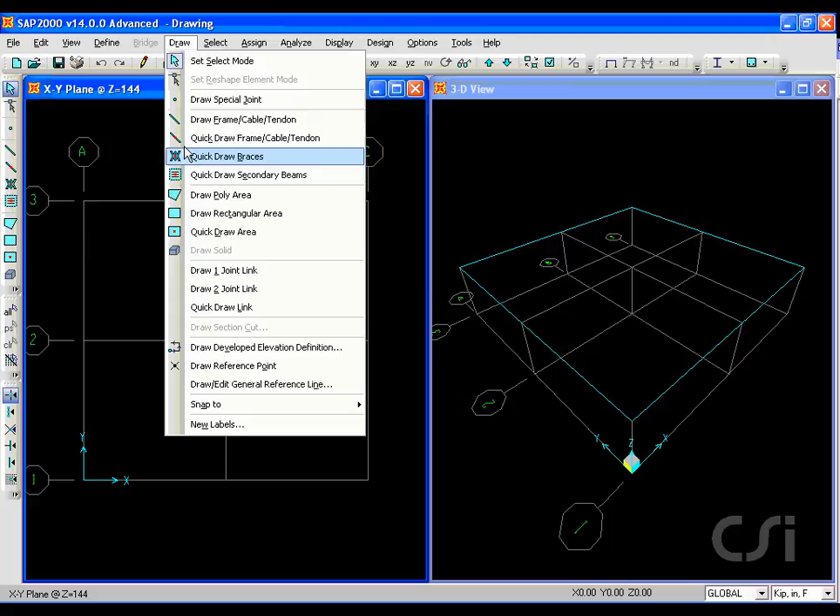SAP 2000 has many drawing tools to facilitate modeling, and this tutorial will demonstrate a number of them. Most models are constructed using either frame objects or area objects. We will start with the Draw Frame command.

We can draw frames anywhere when in a planar view of the model. A right click will lift the pen, but will leave you in the draw mode. You have the option to snap to grids. But again, you may draw anywhere in a planar view.

You can also draw in a 3D view, but the starting and ending points must snap to another item, such as grids, endpoints, and the like. If we try to simply start the frame in space, the point snaps to the origin. You must also snap to end the frame.

There are a number of drawing controls available, including horizontal, vertical, parallel to angle, and others. The letters in the parentheses indicate the hotkey letter to activate the option. If we hit the H key while drawing, the line will be horizontal no matter where the cursor is.

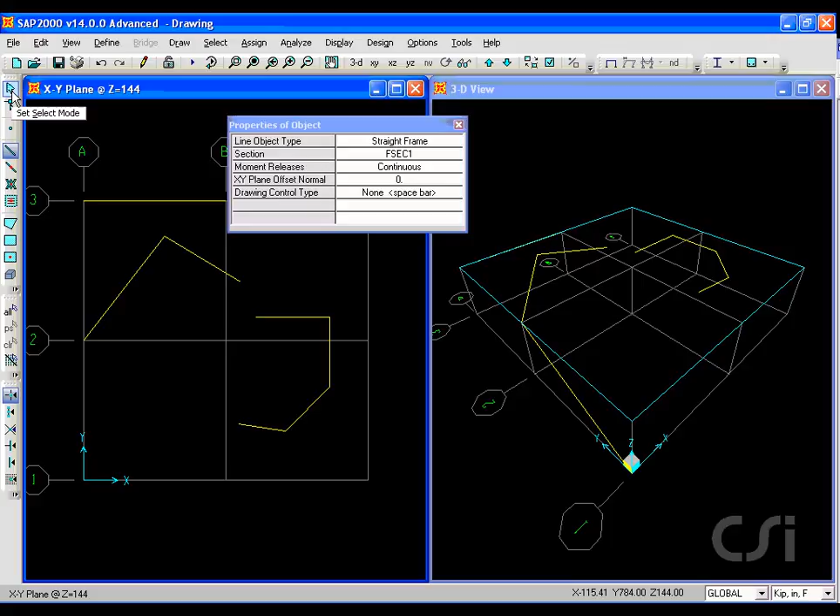The Quick Draw Frame command allows us to generate a frame on a grid with a single click, or on a number of grids by using a selection box.

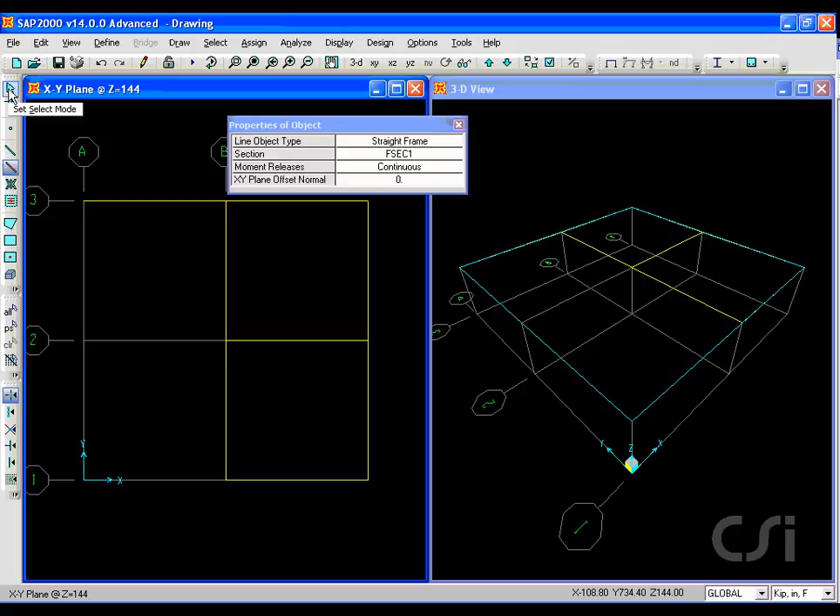Once frames are drawn, there are a number of ways to edit and modify them. One way is to right-click on an endpoint, which brings up the point information form. Select the Location tab and double-click on one of the coordinates. This displays the joint coordinate form where you may edit the endpoint coordinate.

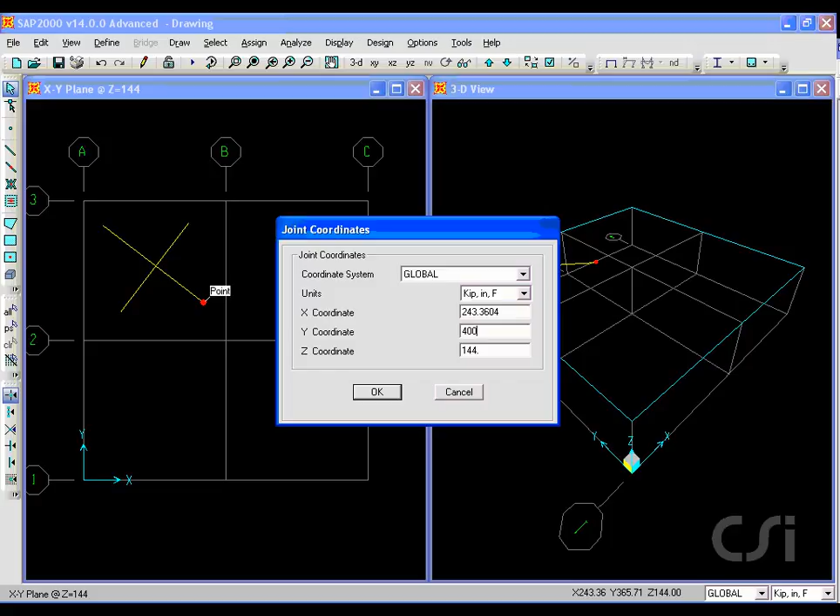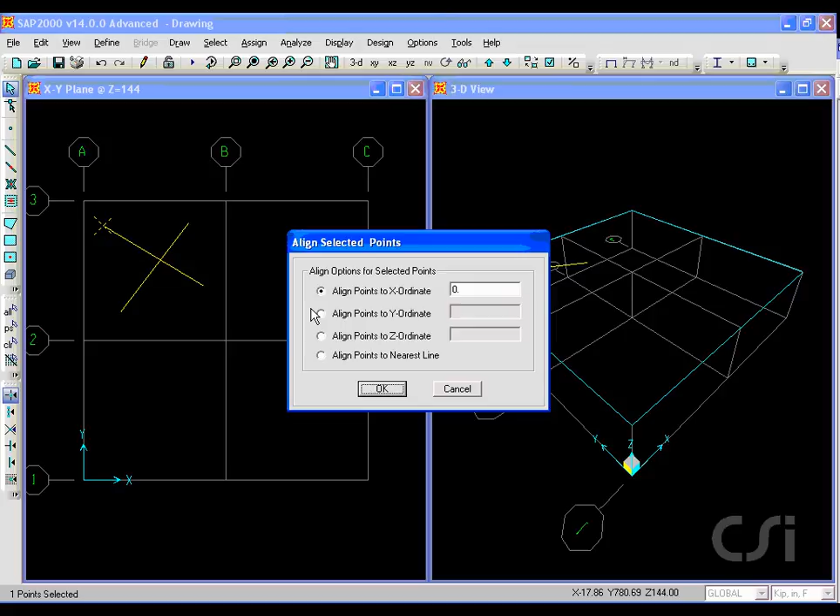You may also move an endpoint by selecting it and going to the Edit menu, Edit Points, Align Points command. If we select the Align Points to X ordinate option with 0, the endpoint will be shifted over to the Y-axis.

The Set Reshape Element Mode command also allows the geometry to be modified. With this command, simply select and hold down the mouse button on the frame object to move it parallel, or select the member and grab one of the endpoints to stretch and rotate the line.

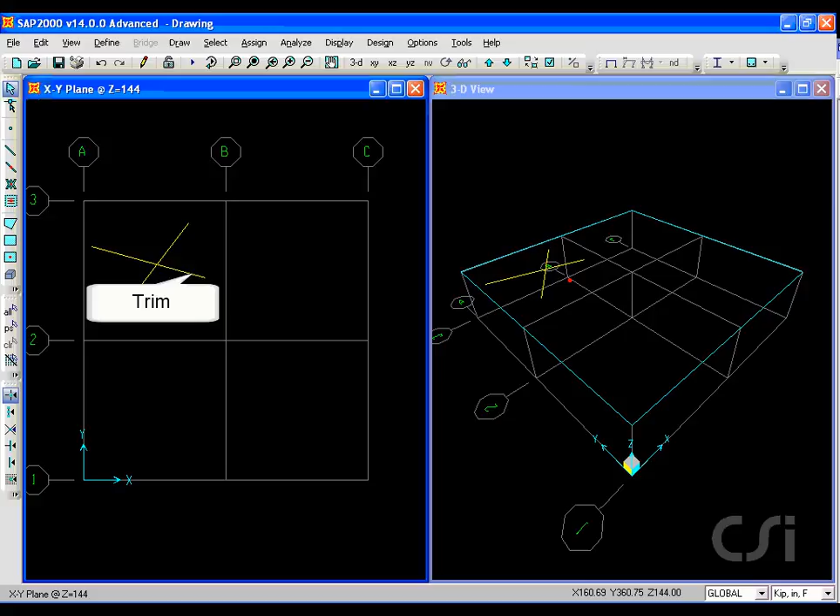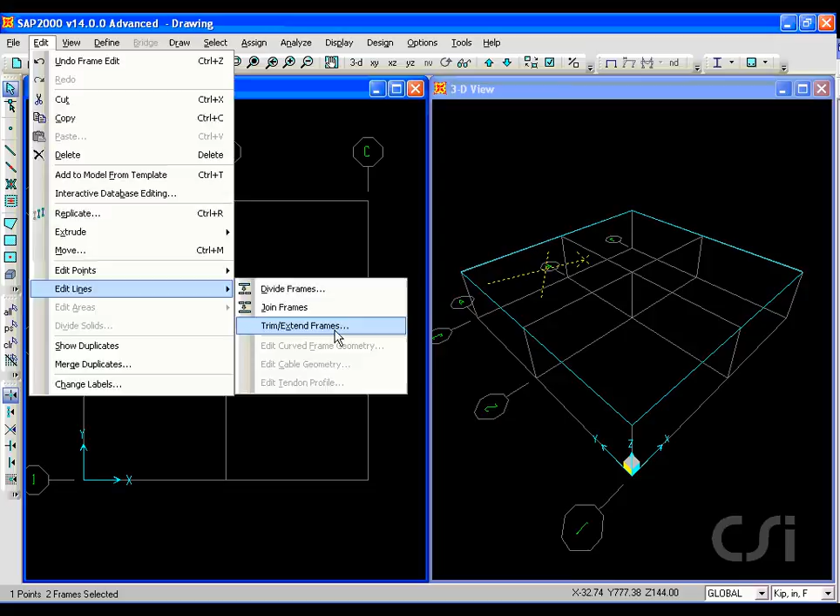Next, we will trim off the segment of the line that extends past the intersection point. We do this by selecting the line to be trimmed, the endpoint on the side to be trimmed, and the line to be used as the trim line. Next, go to the Edit, Edit Lines, Trim Extend Frames command, and select Trim Frames.

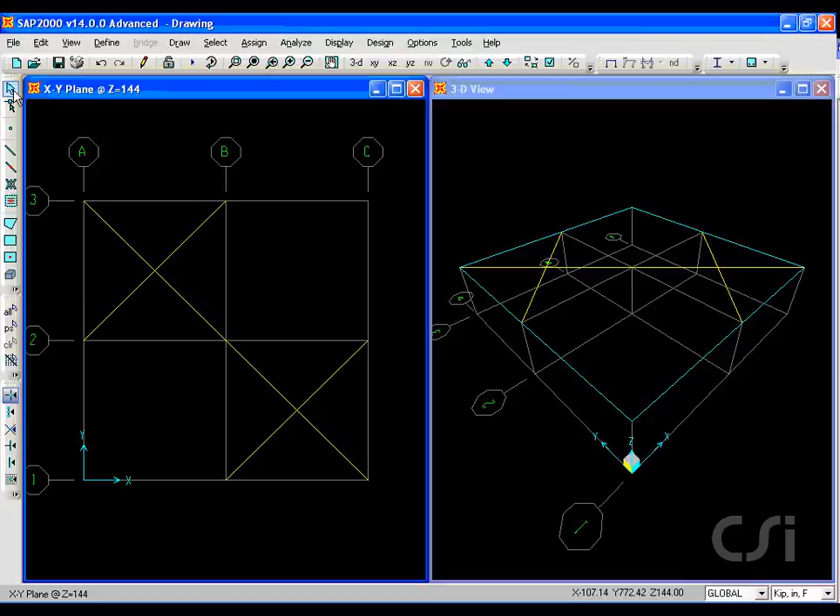The Quick Draw Braces command allows for the generation of bracing with a single click in regions bounded by grid lines. To create secondary beams, select the Quick Draw Secondary Beams button and click in a region bounded by grid lines. The orientation may be in the Y direction,

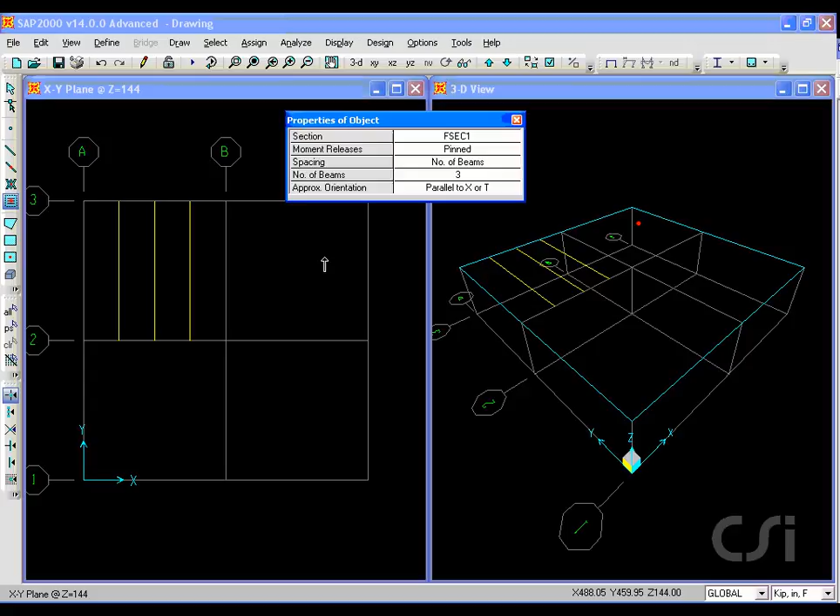the X direction, or in a direction normal to the edge nearest your click. This last option makes quick work of adding miscellaneous framing.

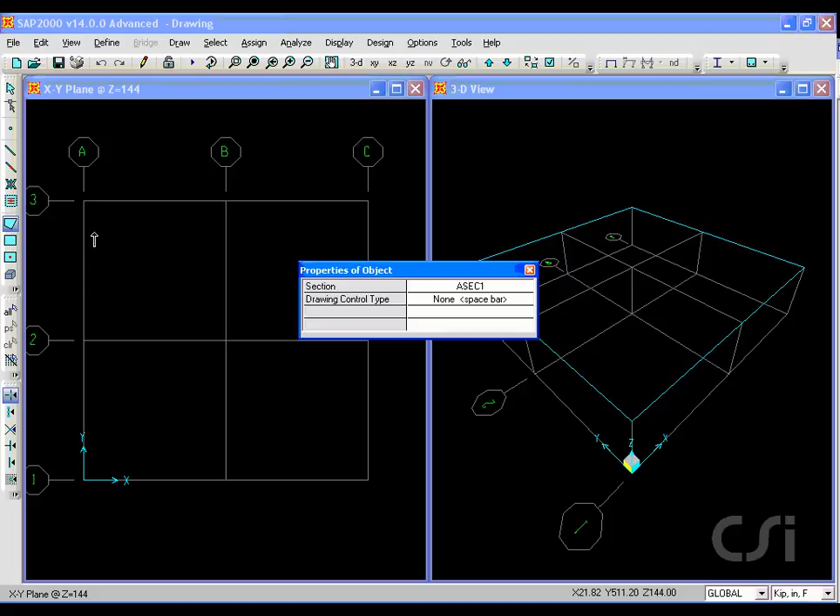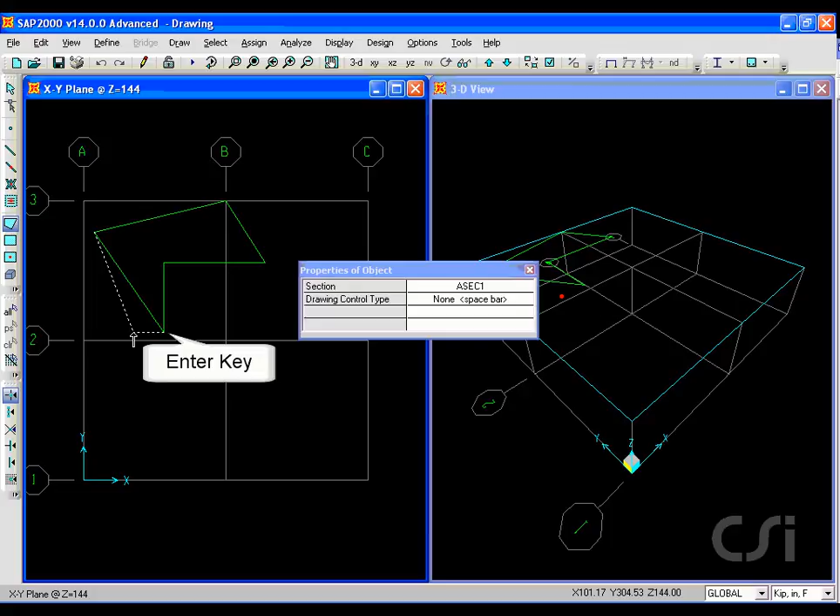Next on the list of drawing tools are the area objects. The Draw Poly Areas command allows us to draw a completely arbitrary polygon, where we can use snaps or no snaps to lay out the geometry. The Draw Poly Areas command has the same drawing controls for edge control as the frame objects did, including the horizontal and vertical options. Note that again, these options may be selected using the hotkeys. Hit the Enter key on the keyboard when your area object is complete.

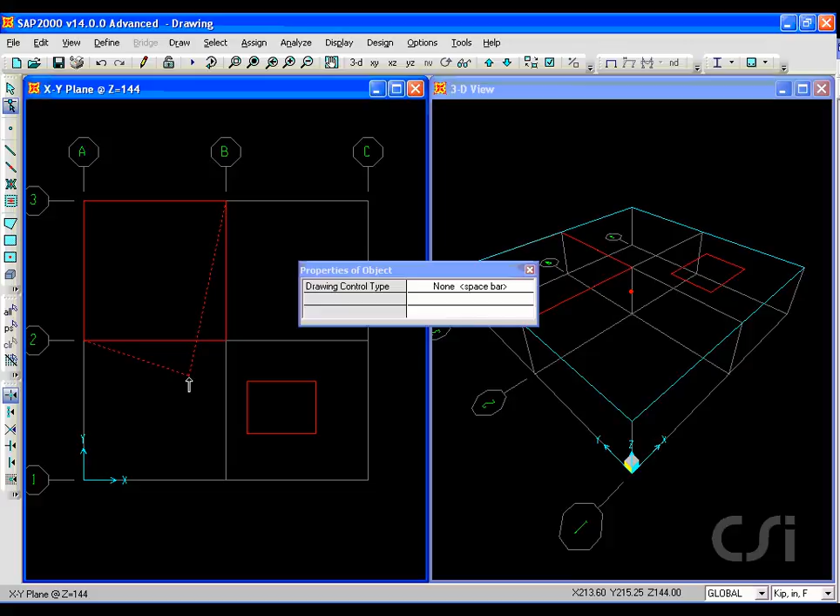The Draw Rectangular Area command allows us to generate rectangular areas by clicking, dragging, and then clicking again to finish drawing. These boxes may be any size. And although these elements were drawn as rectangles, using the Set Reshape Element tool allows us to easily change their shape or to move them.

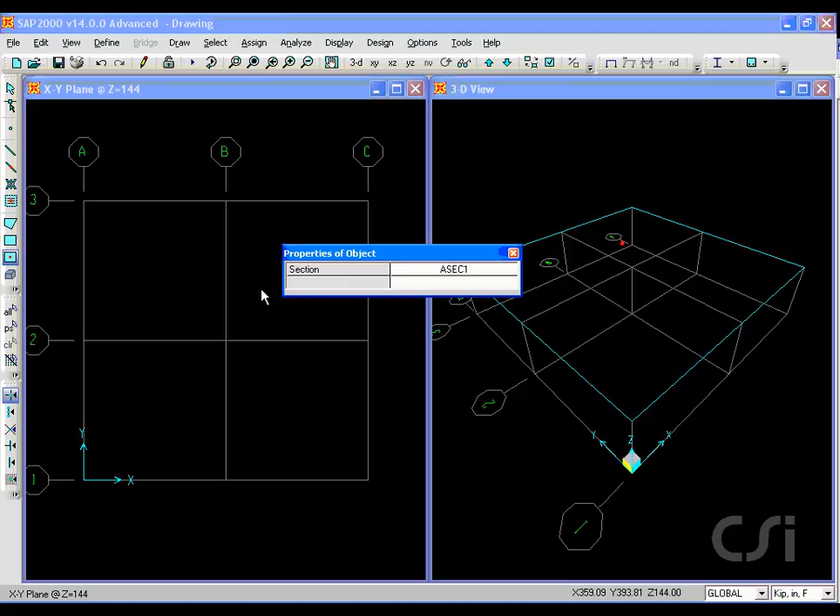The Quick Draw Areas command allows us to create area objects in regions bounded by grid lines with a single click, or in multiple regions by windowing. Throughout this tutorial, we have had the Snap to Points and Grid Intersections option on.

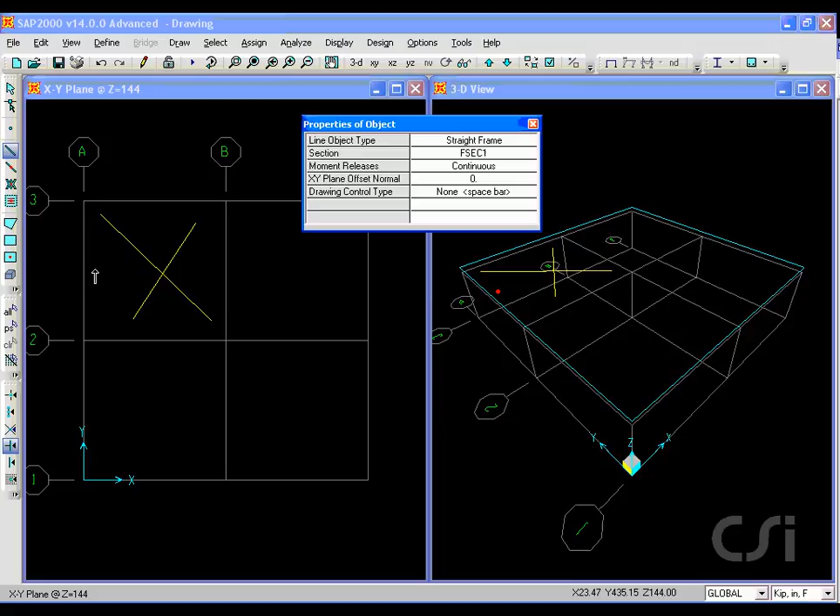However, there are many other Snap to options available, including Snap to Ends and Midpoints, Snap to Line Intersections, Snap to Perpendicular Projections, whereby a line can be drawn perpendicular to any existing line. And snap to lines or edges.

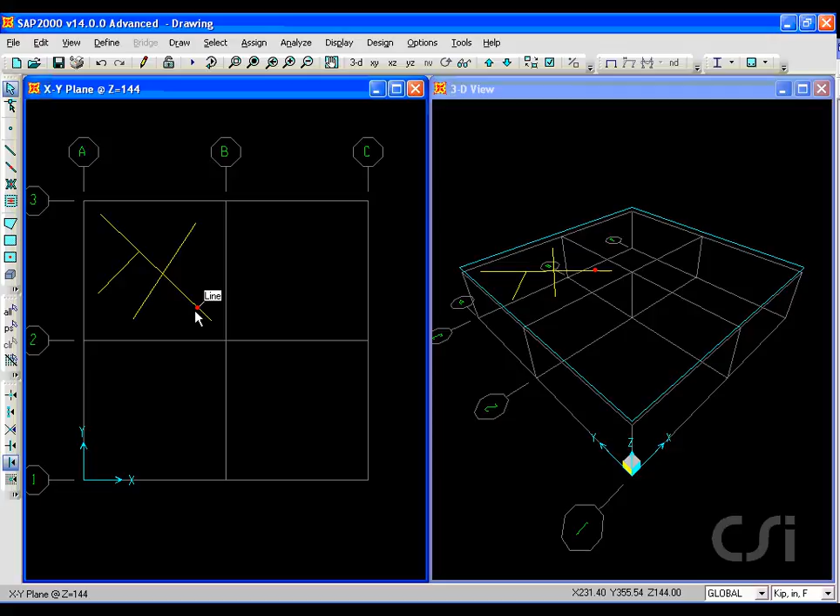This concludes this tutorial.